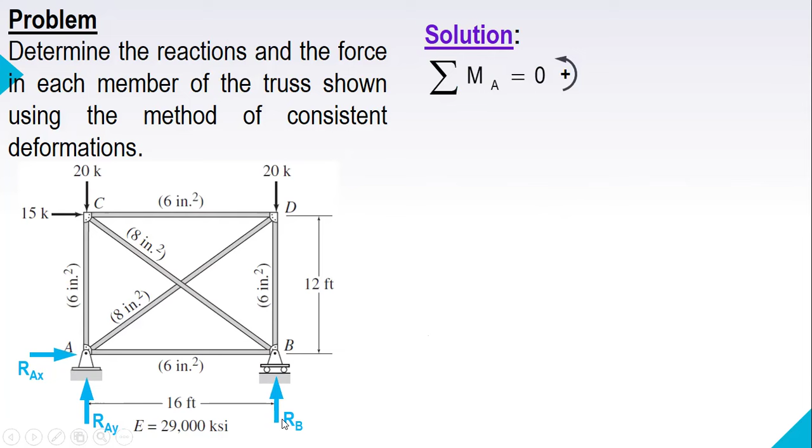So let's assume na upward ang vertical reaction, and then ang RAX is directed to the right. Okay. Let's start with summation of moment about A so that we can solve for RB. So negative 15 times distance 12, 20 is 0, since the line of action of 20 passes point A, and then negative 20 times distance 16, and then plus RB times 16. So we have RB equal to 31.25 kips. And the summation of force vertical, we can solve for RAY.

So you have RAY plus RB, 31.25 minus 20 and 20. We have RA equal to 8.75. So upward, upward kay since positive ang sign. For RAX, let's sum the forces sa horizontal. RAX is negative, so it means na directed to the left ang RAX. Okay. So these are the reactions: RAY upward 8.75, RAX 15 to the left, and RB is 31.25.

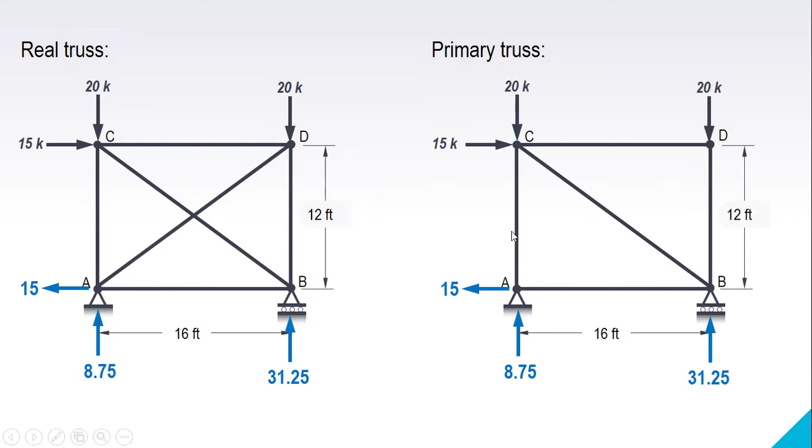Okay. This is the real truss, no? So sa consistent deformation method, we have to choose our primary truss wherein we are going to remove the redundant. So, real truss, and we can make BC as our redundant or AD. Okay, for this one, let's choose AD. So, i-remove na to ang AD. So, determinate na ang truss. And we are going to determine the force of each member. You can use method of joints. So, ang force na makuha na to will be assigned as S prime.

Okay, so balance lang. Starting at A, we have an upward force of 8.75. So, it will be balanced by a downward force. Sa slope sa BC, 12 over 16, that's 3 over 4. 8.75, i-balance ani. So this is compression. So the force of AC is negative 8.75 or compression. Transfer the compression sa joint C. And then sa AB, since left man, i-balance siya right, 15 sad. So therefore the force of AB is positive 15 or tension. And then transfer the tension.

Next is joint D. So 20 downward, i-balance sa upward. Compression, so negative 20. Okay. And then transfer, with 0 since wala horizontal force. So 0. And then sa joint C, we use components, no? So since 0 man, therefore ang mo-balance sa 15 is this one. To determine the vertical component, we can use ratio and proportion. Horizontal, 15 divided by horizontal, 4, and then times vertical, 3. 15 over 4, 3.75.

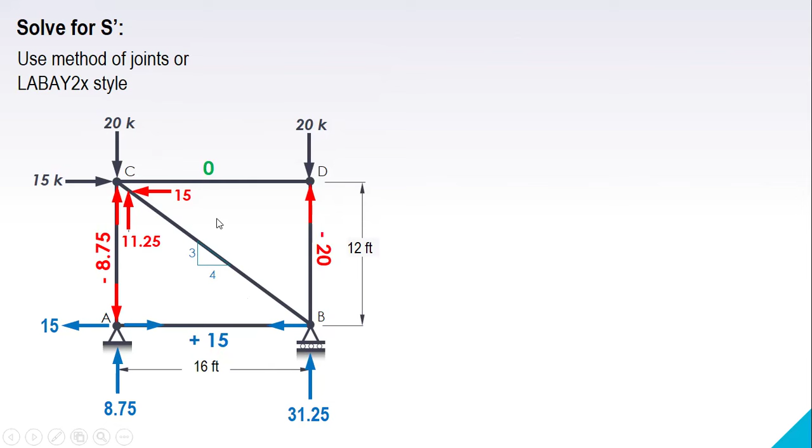15 over 4, 3.75 times 3, you have 11.25. Balance ang vertical, 20 downward, and 8.75 plus 11.25, 20 pud. To determine the force of BC, ratio and proportion again. Ang hypotenuse is 5 man. So, 15 over 4, 3.75 times 5, you have 18.75. Or you can use Pythagorean theorem. Square root of 15 squared plus 11.25 squared. Mao ni ang S prime. Okay? Next is U.

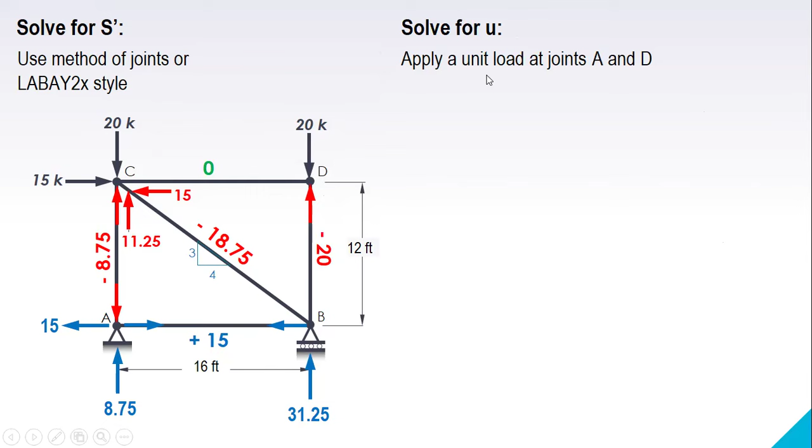So, sa U, you remove the applied loads and i-replace nimo og duha ka unit load acting at joints A and D since ang member AD man atong gi-remove. So we apply unit load at joints A and D. This one and this one. Okay, so before we use method of joints, kuha na to ang components niya.

And we use again ratio and proportion. The hypotenuse is 5, diagonal. So diagonal meaning 1, so 1 divided by 5, times horizontal 4, that's 0.8. And the vertical, 1 over 5 times 3, 0.6. Sa D, same lang po. Horizontal is 0.8, vertical 0.6.

Okay? And we all know na pag ang load nimo, duha ka unit load, ang reaction sa A and B, 0 na. Like for example, if you sum up moment sa A, the unit load at D will pass through A as well as this one. So wala mo balance sa RB. So RAY, RAX, and RB are all equal to 0.

Okay, so let's start sa joint A. So ang mabalance sa point 8 is this one. Right means so left, point 8, that's negative. And then transfer. And then sa point 6 upward, i-balance o downward. Compression, so negative 0.6. Transfer. Sa D, same lang yan. Left man, so right, compression gihapon. And then sa BD, downward to upward, 0.6 also. Compression again. And then for the diagonal BC, components of 0.8, 0.8 sad. So same with this one, tension man, so positive 1.

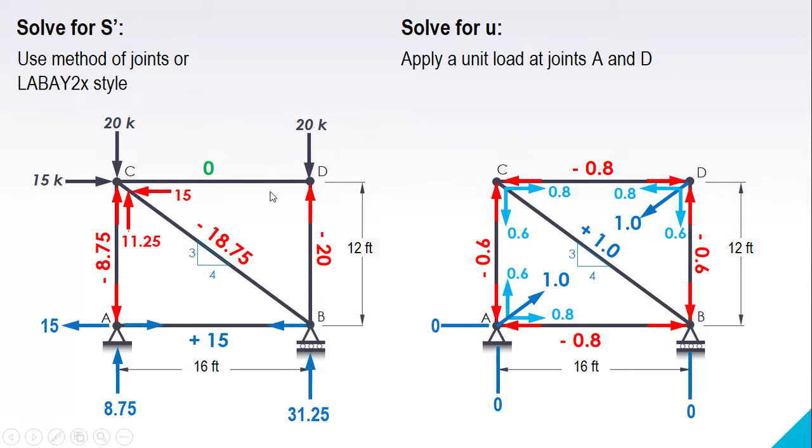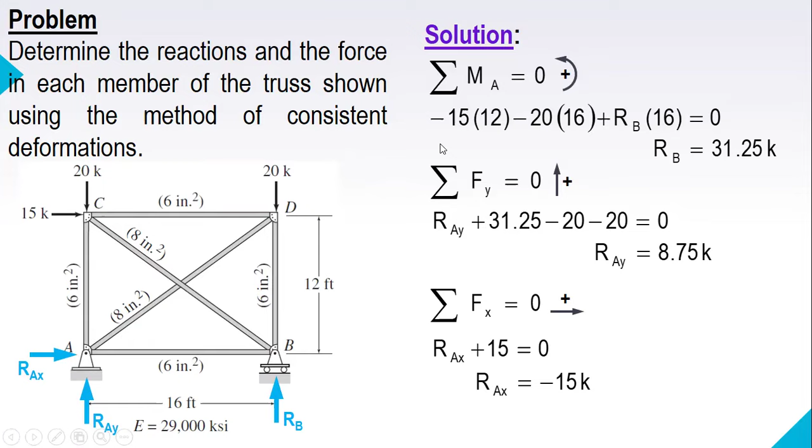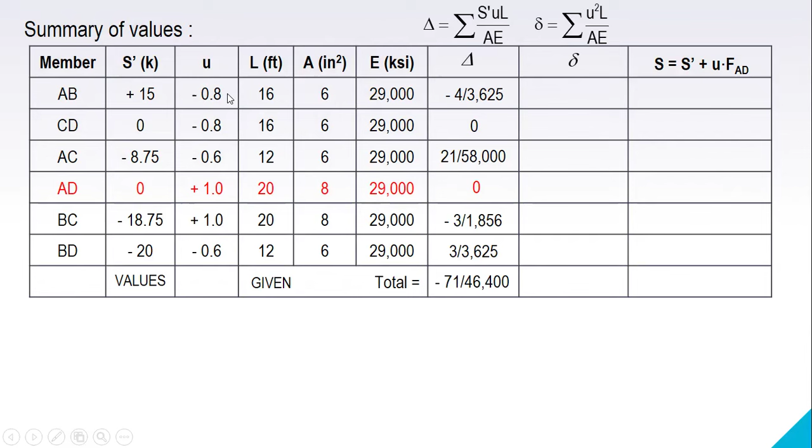So solving for delta, the formula of delta is S prime UL over AE. So S prime times U times L divided by A and E. So for AB, you have negative 4 over 3,625. For CD, that's 0, and so on. So i-add mo, summation of delta. And for this one, that's U squared L over AE. So U squared times L over AE, up to BD. And then you sum up, that would be your delta.

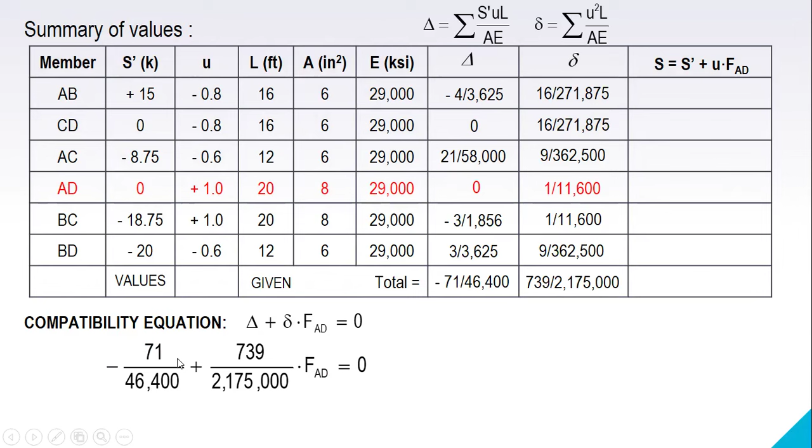So to solve for the redundant, let's use the compatibility equation. Delta due to real load, S prime UL over AE, plus delta times the redundant FAD equals 0. And then we substitute, and then we can solve for FAD. Positive, so therefore FAD is tension.

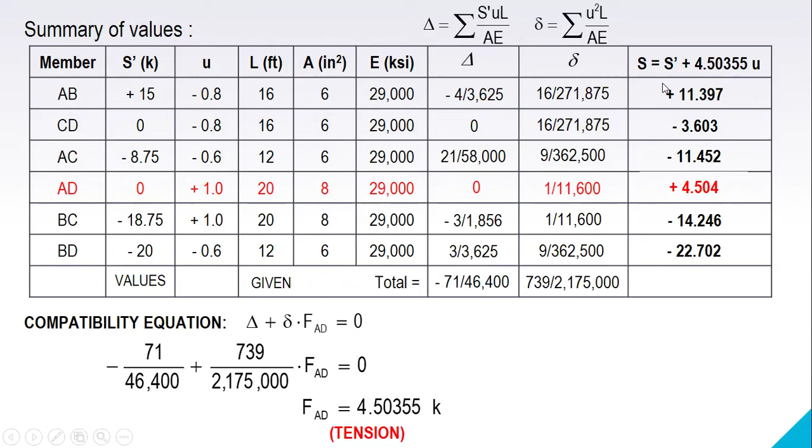To solve for the true value of the bar force of all members, we will use this one: S equals S prime plus U times the redundant. So we are going to replace FAD by 4.50355. You can use the calc mode para mas paspas. Like AB, 15 plus 4.50355 times U, negative 0.8, you have this one. And same with the other members: 0 plus 4.50355 times negative 0.8, up to BD. Mao na ang correct value sa force sa members.

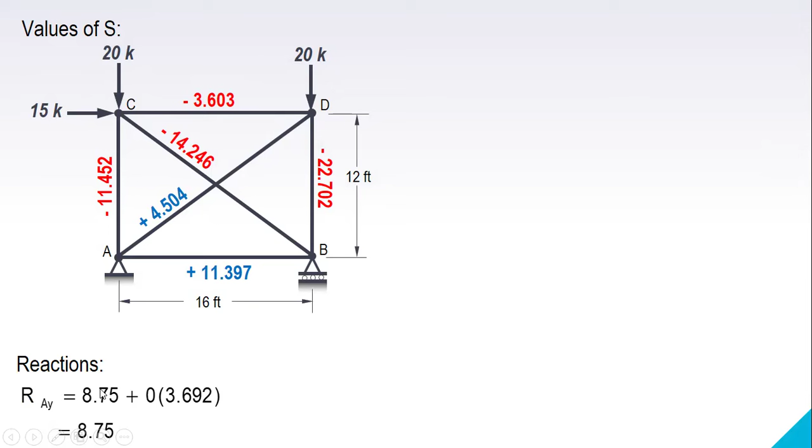And then the last part here is solve for the reactions. For RAY, this is R prime, reaction due to real loads, plus reaction due to unit load times redundant. This is 4 point something, 4.504, typo. 4.504, but still 0 lang. And also this one, 4.504, another typo error. And also for RB, wrong here. This must be 4.504.

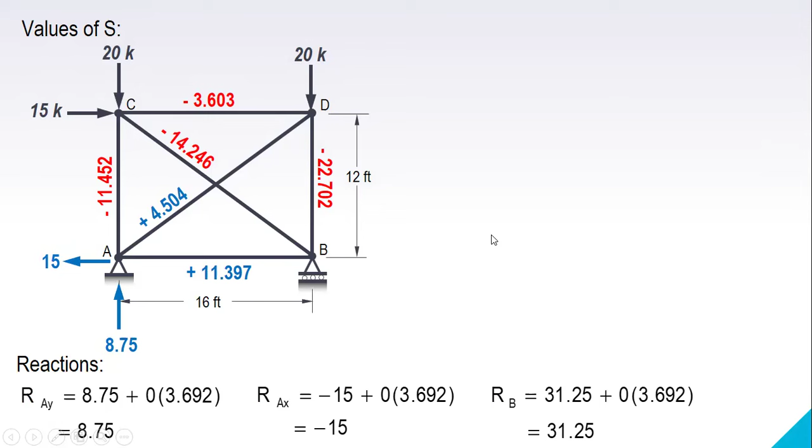Now, to check these values, you can use any software. For this one, I'm using the software by Casimali. It's an open software. And mao ang answers: member 1, 11.397. Member 2, CD, 3.603, compression. Member 3 is AC, negative 11.45, compression.

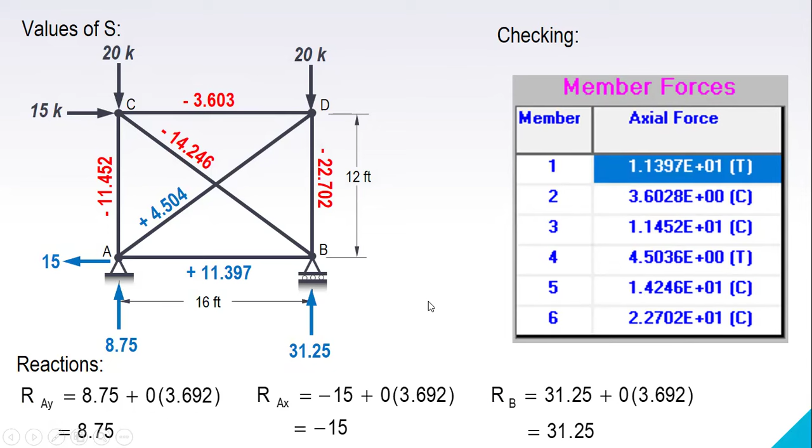Member 4 is AD, 4.5036. Member 5 is BC, negative 14.246. And the last one is BD, negative 22.702. So that's it. This is the consistent deformation method. Thank you for watching.